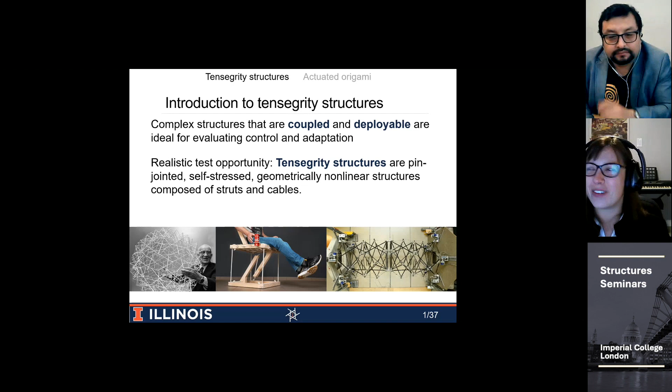On the left-hand side here, you'll see Buckminster Fuller with his traditional tensegrity structure. In the center is something tensegrity-ish, the self-balancing chair that you may have seen on Reddit or some of the internet sites, because people are really fascinated about this right now, and I'm quite interested that my research is actually making it to mainstream media in a way. And on the right-hand side is the top view of the tensegrity structure that I worked on at EPFL. That's actually, sorry, I can speak metric with you guys, 4 meters long, in the lab.

Taking a closer look at this, it was an adaptive deployable Tensegrity structure. It is robotic, so it is a pentagonal module, and there are 4 modules in this view. 2 halves that deploy from each of those left and right sides. There are 10 motors in total. Those are kind of those blue things you see, 5 on each side.

So all of those can be independently controlled, and they wind and unwind cable that you see with that dot-dash line from the support all the way to the midspan. So it controls the length of each half. At the center, the 2 halves connect with electromagnets, so it's completely hands-free. And the springs along the peripheral aid with the actual deployment process because the shape of it, in fact, dilates and gets larger as it folds.

So this is a view from above. It's 4 meters long in total, about 1.5 meters wide and tall. So it's tubular. The idea is that it was going to be a pedestrian bridge structure with the tube being the outer component of the pedestrian bridge. This is at a quarter scale, so only a toddler could really walk through, and we didn't have a deck on it for the reason that we didn't want people to walk on it in the lab during testing. We're just looking at the general structural system. And the whole thing weighed about 200 kilograms.

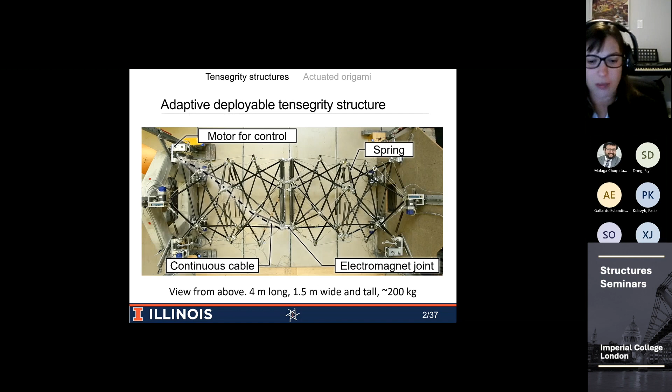So in terms of the actual simulations, originally it was just assumed to be frictionless. The cables that pass over many points over the structure, in fact, do have friction, and that really changed how well we could control the structure. So using dynamic relaxation, which is a form-finding method, I was incorporating sliding friction. So how many points does it touch? What is the angle at which the cable forms? So how much friction are we actually experiencing?

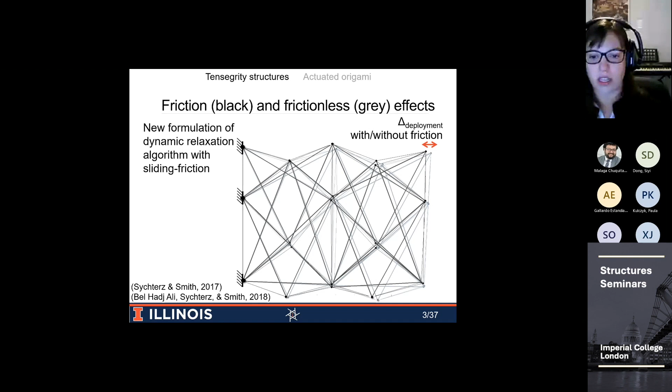So you see that that orange arrow shows the effect of friction versus no friction, where the black structure is the one that has a simulation with friction. And you would see that without accounting for friction, maybe the structure could connect in the middle, but in reality it wouldn't. So we're trying to get closer to the ideal solution.

Along with the simulations, we also had to look at how to program better controls. So starting with just the controls that worked in the lab to make the 2 parts fit together. The structure had its own intricacies because of manufacturing, so the deployment was not entirely repeatable, slightly different each time. We would use optical tracking to measure where nodes are versus where they would be in the simulation.

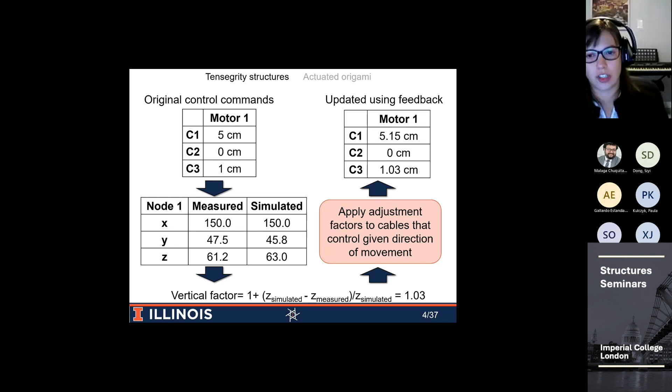Using essentially a correction factor, we could then update the commands for the cables. So tell the motors to unwind, instead of 5 centimeters, we could unwind 5.15 centimeters so that we could get a smoother deployment that actually connects very well. The whole point was to make it a smooth and efficient command to move the structure. That means that we could speed it up in the future and that we're not looking at fatigue issues.

So the blue line that you see here is without any type of feedback cycle that I just explained. It's a little bit rough and we have some bumps and hiccups along the way, and it takes a lot longer. If we do 4 feedback cycles, so we check it, we readjust the commands, and we go again. It's shorter, kind of lumpy. It's not doing so great, but it's a little better.

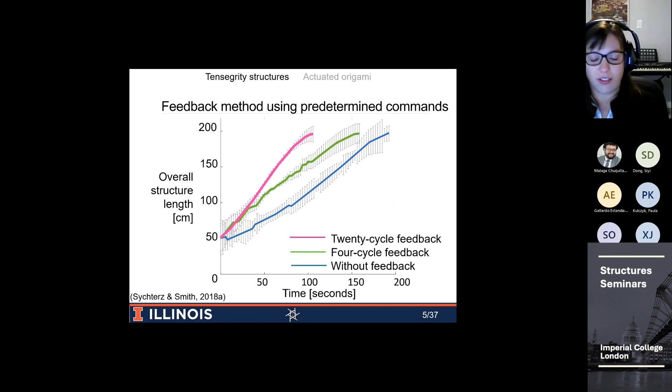In the case of this structure, but it's not true for all of them, every structure would have its own story. 20 feedback cycles meant a much smoother deployment, a much shorter actuation time, and we didn't have those hiccups that you saw there. With a different structure, it would be a different number of feedback cycles. This was just what worked for this one. Beyond 20 was just extra computation time that didn't benefit the shape.

Now, the Tensegrity structure has cables and bars that can easily get self-locking. So we tried to avoid that using the rapidly exploring random tree command. So that's a searching algorithm. So you can see here on the left-hand side, there's 2 paths actually. So in fact, the RRT connect is when you have a starting and an end node, and you kind of search starting at those two nodes until you have a connected path between. So that would be the black and the gray moving towards each other until they find a successful connection.

Now, the commands to find that search were actually to compare all of the different nodal positions in the Tensegrity structure and to ensure that none of the bars were colliding with each other or passing through each other. So this was checked at every stage of deployment. But that ensured that there was no overstress and no element collision.

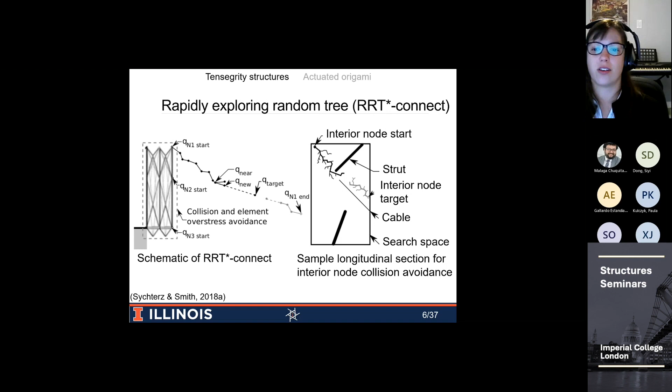So this is a video of putting that all together. The feedback cycles, the RRT star connect, which is what I combined different methods to optimize for this structure, was used when the structure was more folded, when locking and binding of cables and bars was a bigger concern. When things are a little bit more opened up, then you don't need the heavy computation.

You can just let it go evenly and nice and smooth. And then the feedback cycles were really useful for searching at the end so that the two nodes that match up can actually connect using those electromagnets.

And then the self-stress at the end was to ensure that the stresses in the cables were as evenly distributed as possible, as in it would be ready for in-service if it were to be a pedestrian bridge.

Now, another aspect that I was really interested in and coming from Waterloo was I was really into structural dynamics and how do we understand output only signal from a structure.

Using the second order blind identification called SOBI, it's kind of like trying to parse out the dinner party scenario where you hear a lot of people talking, but you're trying to listen for only one particular voice. So the one that's right next to you, or if you want to try and listen to someone who's further away. So using second order autocorrelation and cross correlation statistics, trying to separate out the natural frequencies,

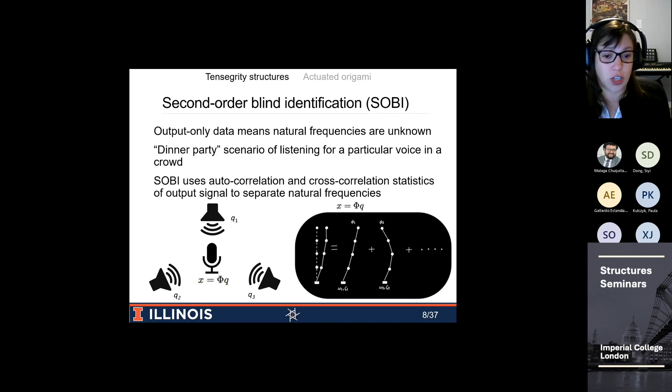So this was extremely useful for my work at Waterloo when we were testing the vibration characteristics of aluminum pedestrian bridges. And this was in partnership with MAADI Group out of Montreal, who was looking at the maximum length that we could make safely with their extruded aluminum structures.

It's kind of a modular to-order length of bridge that they have planned.

And so we did walking tests, crowds of people, and so we used those autocorrelation, cross-correlation methods in order to parse out the natural frequencies of these bridges, including a 70-foot span.

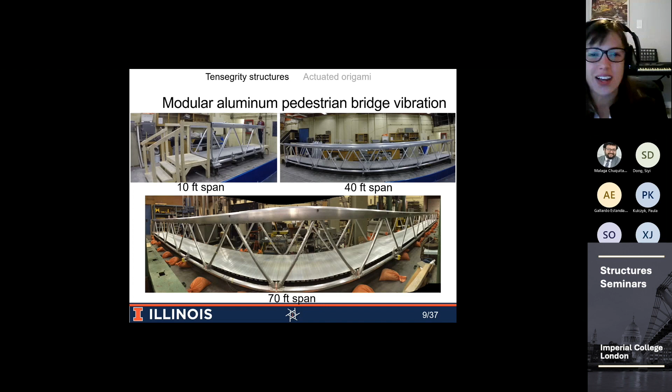And so we found that the methods used to parse out the measurements really correlated well with the finite element models, as you can see for the 2 bay, which is the short one, 8 bay, which is the mid-size bridge, and then the 14 bay, which is that 70-foot bridge.

The finite element models and the measured frequencies really matched up well. We're like, okay, great. It's a truss bridge. It's a little bit more predictable.

So I was really interested in applying this to the Tensegrity structure because there's so much more going on with that one.

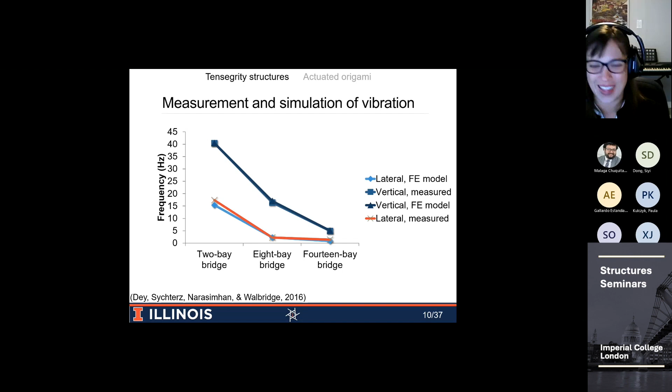So we actually used it for the purpose of damage detection and location. So first of all, detection is whether something is damaged or not. So just a true false.

Examining 4 different cables, which were easier to test than, let's say, the struts. That one I did after I received my PhD in hand because replacing a strut was potentially more damaging. So cables were really easy to damage and replace using an electromagnet that would click and unclick, basically.

And then damage location, much more complex because of your multiple load path situation. And that was using an exclusionary type principle called error domain model falsification that I'll go over.

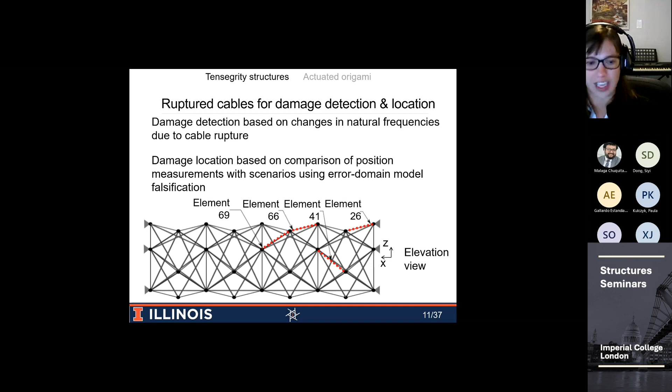So using that SOBI method that I mentioned previously, this is just kind of a snapshot of the first 3 natural frequencies of the Tensegrity bridge. First showing healthy, so as in no cable was damaged.

And then once the structural frequencies were extracted from the structure once a cable was broken, if that precision, meaning kind of a tolerance, was less than the change between damaged and healthy, we could say that damage was detected. If that precision was too high, like for example, the changes when it was damaged were not enough, then we'd say that there wasn't a significant change.

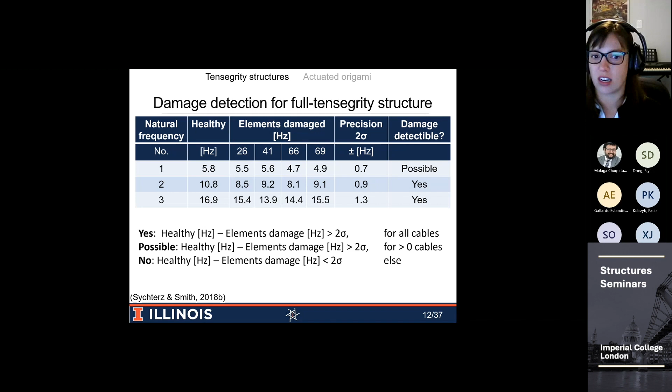We'd say the structure was not damaged. And we check those 4 locations. So if some passed and some failed, that's why there's a possible, or if all of the damage frequencies changed the structural natural frequency enough, we would say, yes, the structure has been damaged.

As for the location of damaged elements, using that idea of generating a bunch of different models simulation-wise, we have our primary factors that we know are important to the structure, each with their statistical importance, including measurement and modeling uncertainty.

Then we combine all those factors together and compare all those scenarios to our actual measurements. We try to see which of our models explains the measurements, and that cuts out the models that don't make sense.

So we're not looking for one optimal solution, but a small field of solutions, which is more useful when an engineer goes to site. We can say, okay, a couple of these elements look uncertain, look at four of these elements, and one of them will definitely be the broken one. Versus sending the engineer to site saying this one element is broken, but our algorithm was a bit off, or it was hard to pin down, and it actually isn't the one that's broken. Then the engineer just comes back and says, well, it wasn't that one, I don't know where it is.

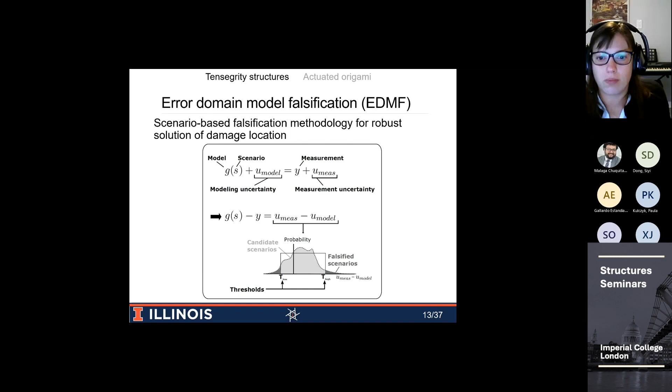So we found this method useful for very practical purposes, giving us a region to inspect. When comparing the measurements to the simulations, we get a swath of effect. When it came to cable elements that we were expecting, knowing the cable was damaged, that swath is actually quite tight. So if we sent the engineer this map, for example, it's very clear where the damage has occurred, even though it's a complex system where loads pass through a range and the whole shape deforms in the process.

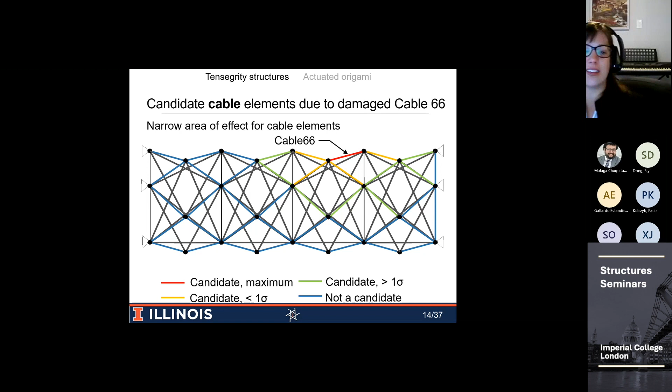That's great, but it does take some time. So what happens if we run the simulation a bunch of times and use case-based reasoning to make the process shorter in the future? You can see that the first section, section A, is when everything was being learned.

We damaged a bunch of cables and compared it to simulation. Each of the run times took quite a long time. But as we then ran more cable break situations, drawing off previous experiences, the runtime started to decrease dramatically until it plateaus at around 200 iterations.

So this is where learning, and now I'm looking more into machine learning, has been super useful.

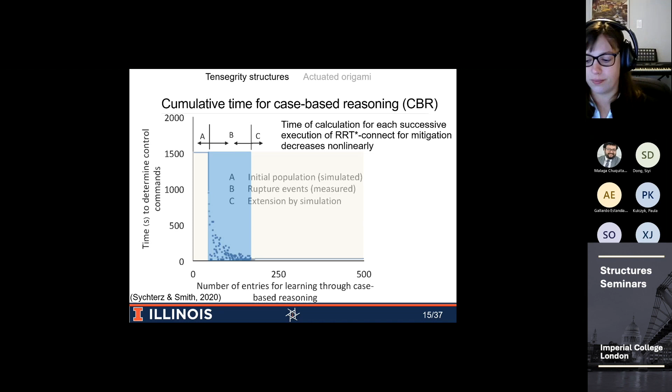So we have an aluminum Tensegrity canopy that's in the process of being built. This is a simulation of where it will go. I bike to work, so we don't have a cover for snow or rain over bicycles right now next to our civil engineering building, and that's what I'd really love to see.

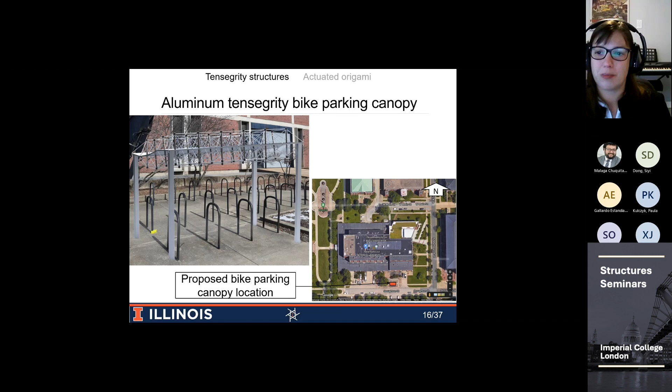This is a plate-based Tensegrity structure, based on a design by Falk, that we're in the process of building. One of my students is doing a great job with this, and you'll see some of her renderings of the plate-based Tensegrity structure.

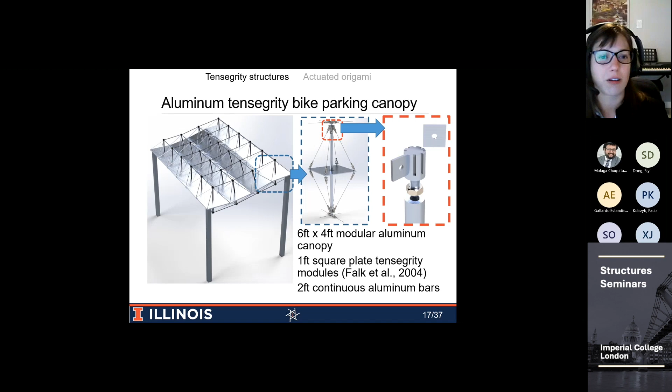Each of the plates is about, in imperial units, 1 foot by 1 foot, easy to assemble and modular. So we're in the process of making the roof itself, a 6-foot by 4-foot aluminum canopy currently, with a bar continuous from top to bottom that is 2 feet long, all made out of aluminum. We have the tab slots that connect all the cables together at the top and bottom of the bars.

Using ASCE 7 load cases, we're looking at wind and dead loads, and we have a bit of curvature because the university was interested in a higher ceiling height at the front of the bike parking canopy, which also gave us an opportunity to look at some curvature of the roof.

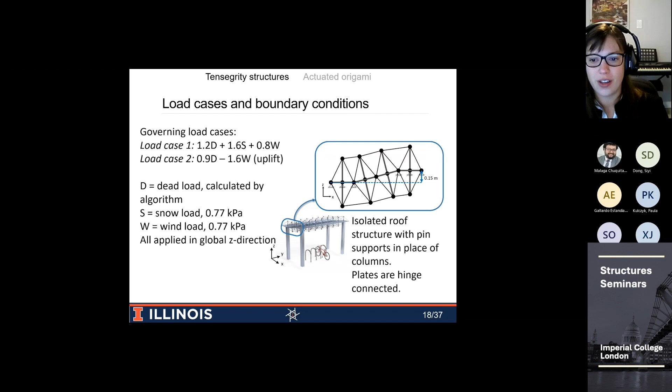Looking at some deflections, obviously there are some, but we're in really good tolerances right now. With mechanical couplings, we can tune that up as we're manufacturing it. Overall things are looking good in terms of the plate thicknesses, bar strengths, and our stainless steel cables that we'll be installing on the modular structures.

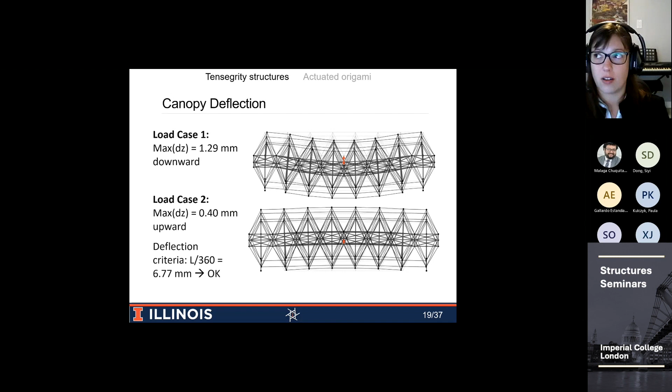The problem with some of the Tensegrity structures is that the canopy is great because it's not moving, so the university gave us permission to build that on campus. But with the moving Tensegrity bridge, the challenge is that no one's actually seen this in real life, so one of the really exciting things I got to work on was building this in VR, in virtual reality.

So that we can show people what it could really look like if you would walk through the structure. With help from the Supercomputing Center at Illinois, I got to work on this project where we could even disconnect the structure and reconnect it. The cables are actually continuous, just like the real structure. And there's a deck that comes in later that you can walk across. We made the deck glass so that you could look down. Hopefully you aren't afraid of heights, but there are railings so that you don't fall off.

It's a really fun experience and an easy way to show other engineers, people who are interested in maybe building these things, or architects, how it feels. This is something that was hard to convince people with just 2D drawings, for example.

So I'll put it further back where you have on the bridge itself the actual deck. And we have our stick so we can interact with the structure, you can actually move it, which is quite exciting. We even have a way of measuring displacements in real time. This was really useful, so you can compare our simulation to the actual measurements I got in the lab.

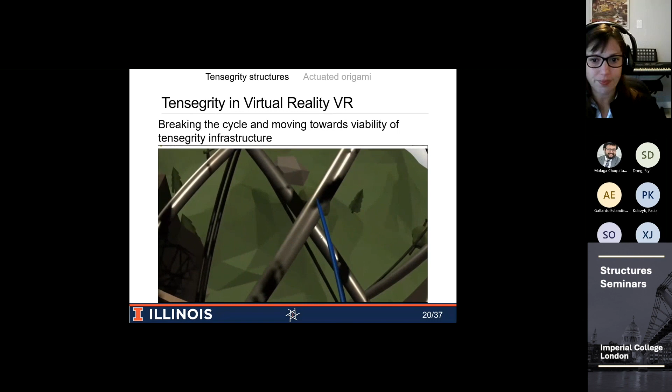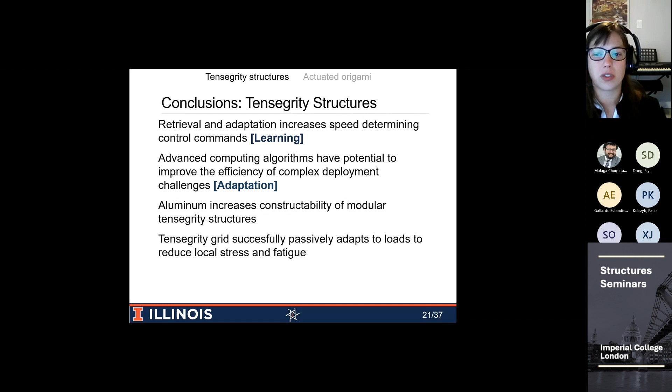It's so much lighter, so much easier to work with. Yes, aluminum is a bit more expensive, but it's also corrosion resistant. And the Tensegrity grid has successfully been able to passively adapt to load, so it can slightly flex without stressing out.

So the other half I'm going to talk to you about is origami structures. Origami structures are uncut sheets consisting of valley and mountain folds. Kirigami are cut pieces of paper. They can be developable from a flat sheet and can exhibit rigid foldability.

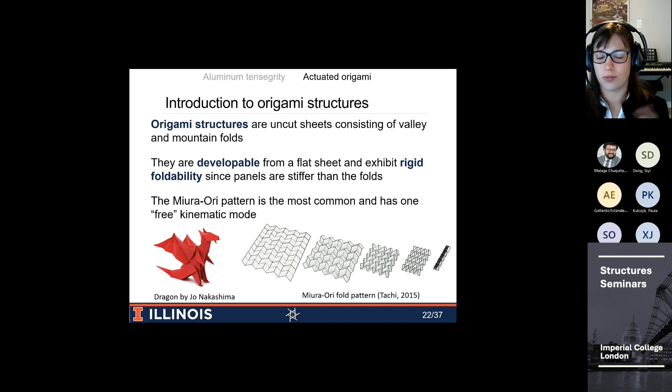What you'll see on the left-hand side is more artistic origami, like a dragon, or scientifically what we use as a first basis, the Miura-ori, which is a very simple pattern that is flat foldable and rigid, but we can also look at its non-rigid behavior. So obviously looking into actuation, which is what I was interested in during my PhD. When I went to Michigan, I was like, great, how do we actuate origami so we can move things repeatedly, not necessarily just by hand, but if we're dealing with larger structures.

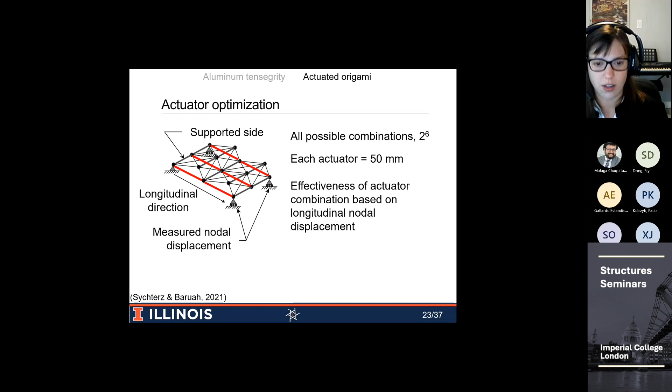So in the longitudinal direction, we looked at all the realistic actuators from end to end, where we could put them and what their effects are. The actuators are those red bars that you see, and then we'd measure the nodal displacement in the longitudinal direction.

And how to actually model origami, I was using dynamic relaxation again. There are other methods, however dynamic relaxation is fast and doesn't require the inversion of the stiffness matrix. So when you have large displacement structures, it's really handy.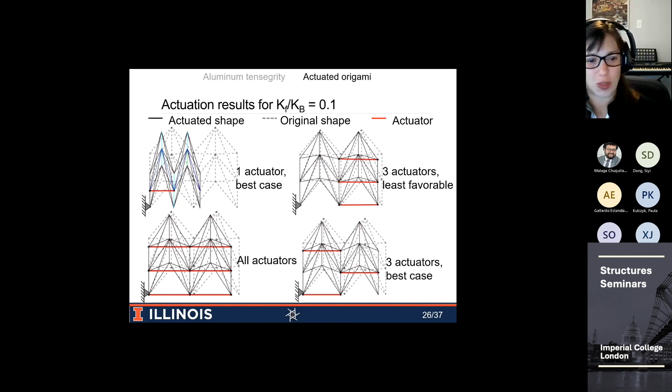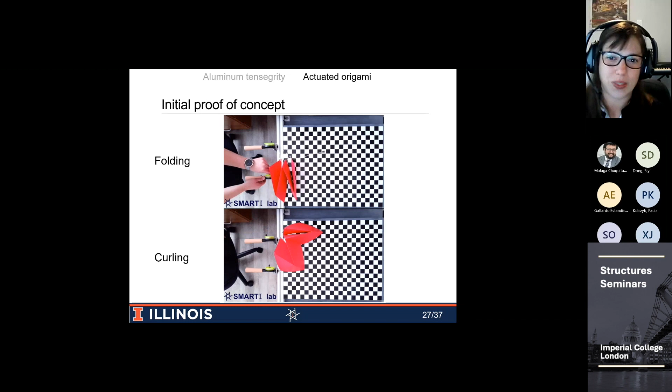So this was also looking at bending, and the big thing was curling, which is obviously panel bending that's not rigid, for continuous cables. So this was the first studies I was doing during the pandemic. This is a rig that we set up with a camera for tracking with that black and white grid. This was kind of our first medium-sized proof of concept with paper, but we've definitely moved on to 3D printed rubber hinges and harder plastic panels.

But then comparing dynamic relaxation to our actual measurements, we're looking at the difference between the two, and we saw that dynamic relaxation was pretty strong in how it characterized the movement of the origami structure. So that was really exciting.

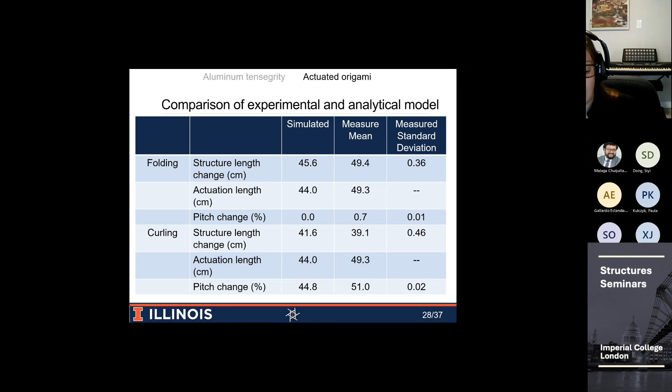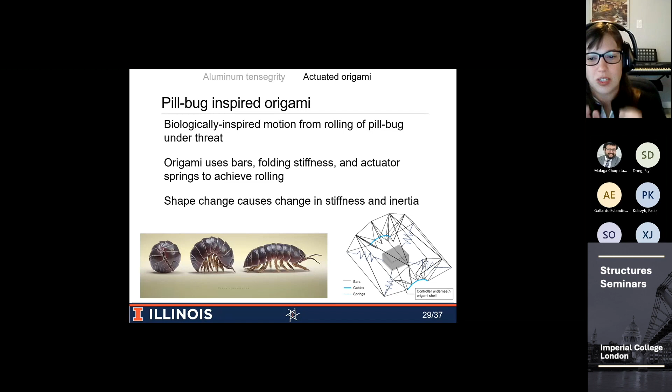And we've moved on to some other really cool origami structures, including bio-inspired origami. Pill bugs or roly-polies, depending on how you see it, are really interesting. They can roll up when they get stimulated, kind of like an armadillo. In the southern U.S., they have armadillos as well. This idea of having an external shell that can roll up into a ball, and looking at actuation on top of that from the inside, like muscles of a bug basically, to initiate that curl. I was more focused on the actual shell for the moment, though.

So applications, it can be really useful for temporary shell structures, for pop-up shelters, for example, something going from completely flat, easy to transport, into something that's kind of a semicircular shape. It can be tunable as well with that idea of the motor or the control underneath. On the left-hand side, you see the 3D printed structure is just kind of a 30 centimeter model that we have. The clear parts are hinges of rubber, and yellow is hard plastic. And then you see here the same rig before controlling the curvature of the structure.

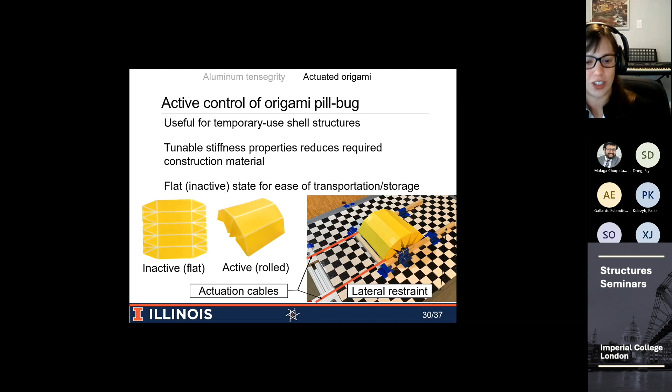So we wanted to look at the dynamics of this using Sofistik, a German software really great for dynamics. We're looking at the frequency of the structure. Obviously, it's not great at looking at the dynamics throughout the deployment process. So it's more just spot checking the shape of the structure throughout the deployment process, and those coordinates are from dynamic relaxation. So what we're looking at is a change in stiffness of the structure from when it's unrolled, as you can see the bug on the left-hand side of the graph.

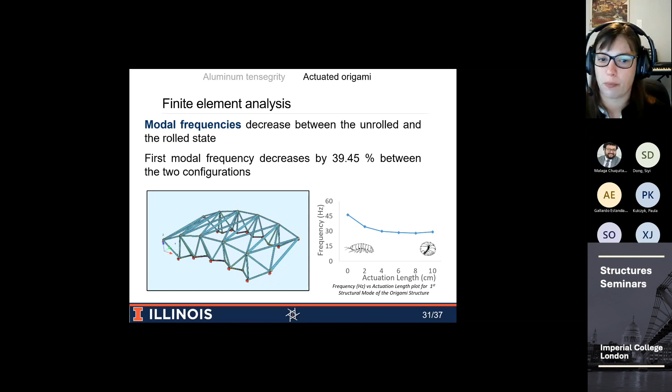And then, sorry, it's stiffer when it's unrolled, and then it's a lower stiffness when it's all rolled up. So we're trying to use this now as structural components where we may need to mitigate vibrations, for example, which is super interesting.

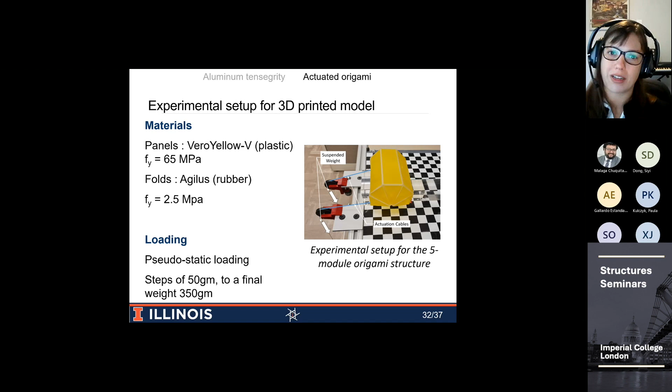As I mentioned previously, we used a Stratasys 3D printer, which is a resin-based printer. So you don't have as much of the striations and the issue of bonding between layers for the origami. This is a yellow plastic, so you have about an fy of 65 MPa, and the folds are much softer at about 2.5 MPa. We load it with loads off the pulleys, as you can see there. And we're actually in the process of using a camera from above for machine vision to track the deployment and the deformation of these structures, which is really exciting.

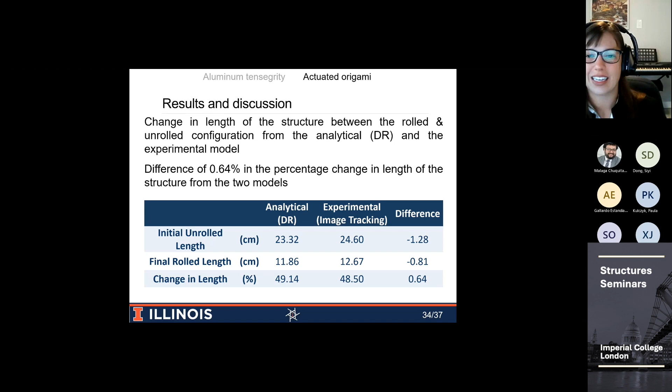So comparing it for the rolled origami structure, dynamic relaxation versus the image tracking, so far we're getting pretty close results. So we're really excited about that. But we just need to do some more tests and confirm, refine, that kind of thing. So we're really, really excited about that. That work is going to be coming out quite soon.

And then as a wrapping up on the origami side, the big thing that we take away is that dynamic relaxation is super useful for origami structures, especially when we're looking at actuation. And the new module that was built for dynamic relaxation is super useful for not only Miura-ori, but for other more intricate shapes or less common shapes, I would say.

And so it can also be used to calculate the energy from those folding and bending stiffnesses, where we can actually either detect that damage is going to occur, or that's going to be a good location to observe when damage occurs. So kind of coming back to that damage location and detection from the tensegrity structure.

And as mentioned before, applications so far that we've identified: building components, lighting, shading, that kind of thing. Architecturally, we're looking into exactly how to implement these. Emergency pop-up shelters has been a big one, and then vibration mitigation because of the change in stiffness of the structure.